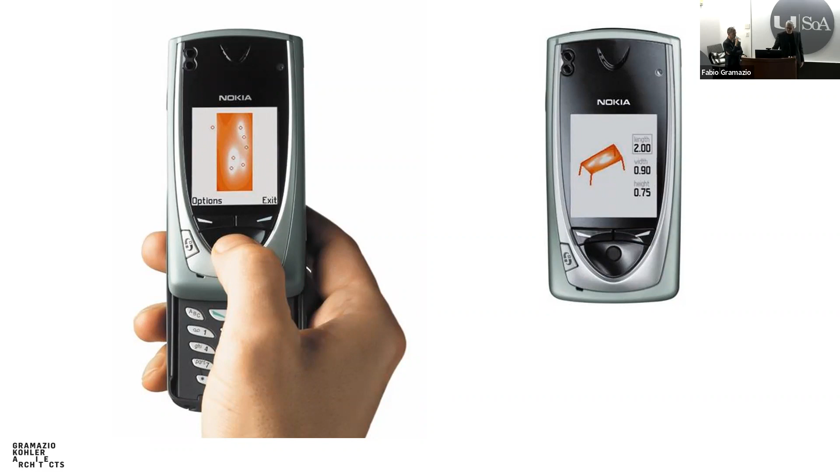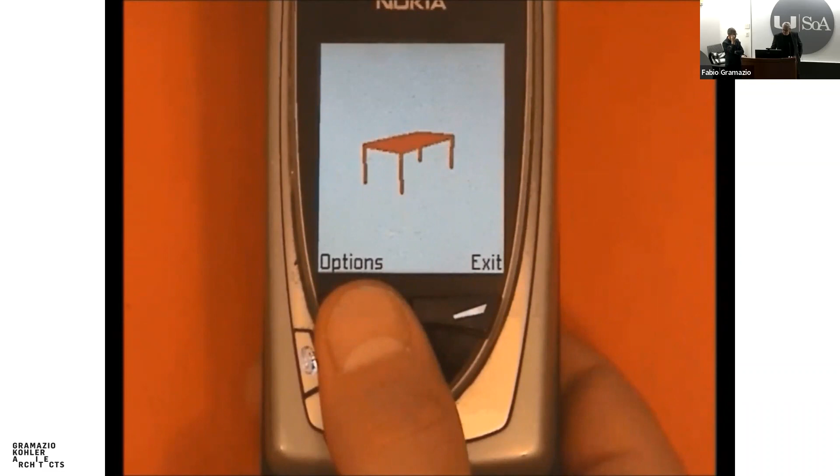So we were inspired by this and wrote a little program which allowed you with the thumb to design a table. It worked like this. You could basically move a cursor with the joystick and press with your thumb. And by pressing with the thumb, you would actually push in the lower surface through the upper surface up to the point where you create a hole in the table. And then you could send your design over the internet, and it would basically create this table for you. As you could see, you could also choose the color, you could choose the size of the table.

Now, what's interesting, the data which is sent looks very simple. It's a few numbers. You see here the author's name, Mike in this case. You see a color code. You see the length, width, and height indicated by L, W, and H. And then you see these basically 7 points which are indicated with the pressure data of where the human put the cursor and how much force it applied. So very straightforward. That's what you've been inputting.

That's sent to the server, and the server then recreates this surface, which is a distorted, doubly curved surface, which expresses this human touch in a digital domain. This data directly goes onto a CNC mill, which then transforms the physical material by removing this timber. And it results in a table, the M table, the mobile table, or the table designed on a mobile phone, which has these features of basically material loss in a way, where you see it has these very thin edges outside on the border of the table, also on the table surface.

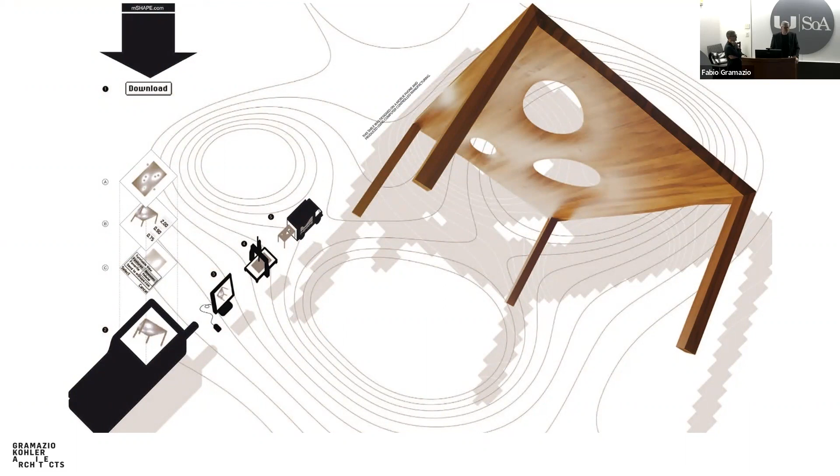It has this quite delicate landscape underneath. We then produced a kind of poster where you can see how this entire process is supposed to work for a potential client. Of course, you can imagine this wasn't a huge commercial success. This was really a prototypical project for us on mass customization.

But it was very important for us because it showed us that as designers, in this case, we could design a family of objects by designing a code, by having an idea and encoding this, and having other people participate in co-creation with this code. So all these tables here, you can see, easily belong to a family of tables.

So we're not losing any authorship by delegating the form actually to someone else, while in classical understanding of design, you would say the designer is mastering the form, right? And in this case, we're mastering this design system, which produces a form. So it's a different state of action.

Okay. So this table project, this was 2002, and this looks like it's a very long time ago. This phone looks prehistoric technologically, and back then it was the very beginning of our practice. We were doing competitions, having the time to do such open-ended projects, ending up with this rather ironic, but also very critical sort of project. And then just a few years later, this is now 2006, we're still trying to explain how we ended up being, as we were discussing before, the robot guys.

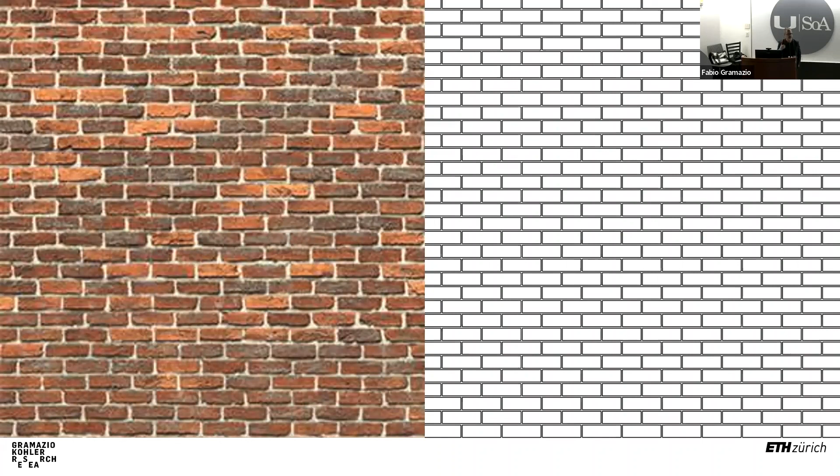But we all know that, for example, if you describe something for production, you will not draw it up for the building site, but there are much more powerful codes, cultural conventions, technical cultural conventions, like the concept of a bond type, that allow us to describe the end result through a process. So bond type, a stretcher, many people share the understanding of what this means. And this is not an image, this is a sequence of actions. And this is already very close to a program.

And once you have this term stretcher that you share, then you just need a few parameters, very simple ones. Think back of the table. So you need the size of an object, a brick or a type, and then you need a few dimensions, and then it's done. So you can describe in a very compressed way, in a simple way, what you want to a human. If you want to tell this to a machine, let's say a robot, a computer, then you cannot use the term stretcher, because the machine doesn't know what a stretcher is.

But there is this notation here that is as simple as possible, because it's just the basic control mechanism of programming. One of the basic ones, that means looping, repeating something, where if you nest two of these things, one into each other, then what you get is a brick wall. So it's the exact identical description as what we have seen before. And here is where a robot kicks in. You could say, okay, this is uninteresting, this is banal, we are just automating something. So we are creating again a stretcher bond.

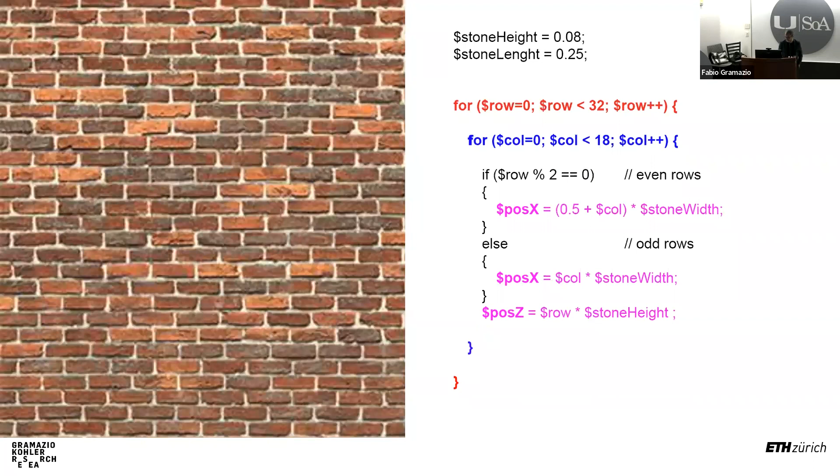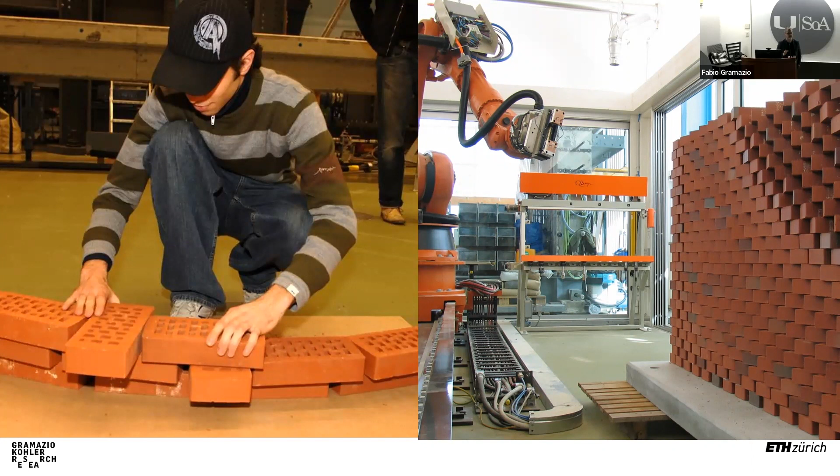But this is where the circle closes. The machine that doesn't understand what a stretcher bond is understands this very well. And it's the only thing the machine, I'm talking about 15 years ago. Now we could discuss new developments, but back then this was what the machine would appreciate, would understand, and would execute independently from concepts of complexity that are important for us humans. For the machine, there is no easy or difficult position in space. They are all identical as long as they are in the reach of the machine.

So we are able to connect directly the human act of designing, of making design decisions, with the machining act of building. And what is important here to understand, and there I go back to this artist image, what we want to leave behind is this notion of competition, of antagonism between human and machine that is deeply rooted, of course, in 20th century experience, 19th century experience, cultural experience about what machines mean to society. But we are convinced that by reconsidering this relationship, turning it into a positive collaborative one, where we say, okay, what are the roles? What are the strengths of humans and machines? We can do things like this.

And this is probably one of the first moments when we felt that we would need a term like digital materiality that would describe what happens here. Because there's a thing that cannot be produced by humans, but it is clearly designed by humans, follows a digital logic, but it's completely three-dimensional. So this is not 2D graphics. And it's the result of a collaboration between humans and machines.

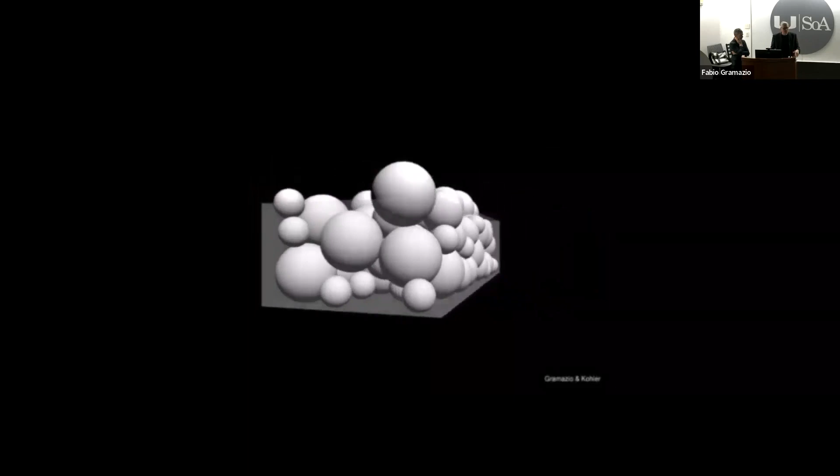What you can see here, you probably see it best in this animation, is how we designed this facade. We looked at this building as an abstracted container in a way and filled it with oversized abstracted spheres, which were meant to be grapes, but not in a depicted sense, but in an abstracted sense.

We then looked at this container from the four sides of the facade and basically took this view into this virtual three-dimensional space onto the facade by translating these spheres into rotation of individual bricks. You see here this dynamically filled volume. So again, we delegated part of our design control to designing a process on how we would design this facade.

Tune down the volume here a little bit.

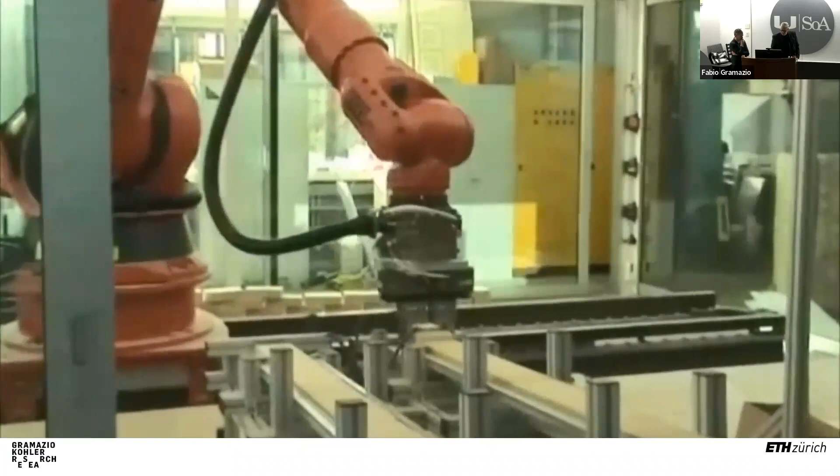So here's how we produce the facade. You see the robot picks brick by brick, as Fabio previously explained. And he, or she, we don't know actually, it applies the glue. And you see this particular pattern that's quite important. That's actually exactly the overlap area between two bricks. And since each one of those bricks is individually rotated, of course, the overlap pattern is different for every brick.

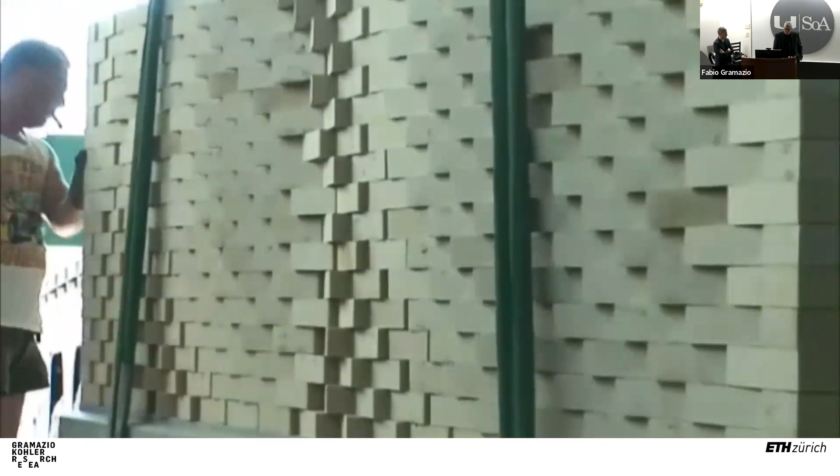That is something which can easily be solved with the computer and with programming, but for a mason, it would be rather hard to always put this glue at the right location without spoiling the next brick. You see here how traditional crafts and this digital craft come together. You see the installation, you see the reference in a way, and the transfer.

And you see that only by this very slight rotation of the bricks, that's only up to 17 degrees in one direction or the other direction, so a very small rotation, in the sunlight this creates a very strong plasticity. And you can also witness that the material itself, the brick, gets a very high presence by this design principle.

So it's not the same as producing just a digital image, just a pattern. Although it is somewhat similar, it actually exposes the material, the brick, when you go close, and you start to, in a way, lose the more pattern-like aspects if you approach the building.

In the inside, you have also an imprint of these transformations. Here it was important that the bricks were put very closely together so that the rotation would actually start to close the gap in between them. If we would have put the bricks 1 or 2 centimeters more apart and you would rotate them, in the counterlight you wouldn't see anything.

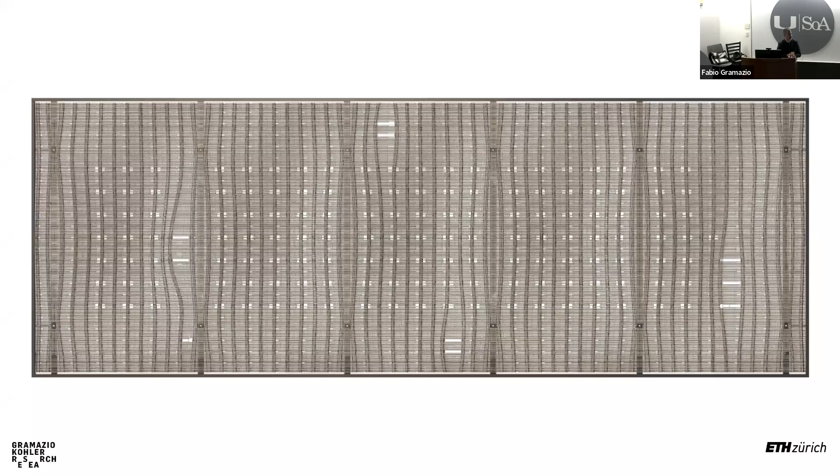And what you see here is probably the only drawing that exists of this roof. It's a plan view, and you see here about 50,000 different parts that are aggregated in a way that looks or feels very much like it would be a textile, a fabric. And we like this image very much, although you never see it like this.

It's a virtual viewpoint, but you see phenomena like these big trusses, 15 meters long by 1.20 meters, 168 of them, and how they can stretch and compress depending on other structural parts, which are in most parts the columns supporting the roof, but also less important things like ducts that need to punch through the structures. Normally, above the staircases and things like this, you get these dimensions very late, and then often they're just cut through a structure in a more or less ugly way.

Here, what is nice to understand is that until the moment this structure is built, it's just computation, it's just data, it's fluid. And until the moment you decide for the production, you can stretch it. So the material can create openings to let parts pass through.

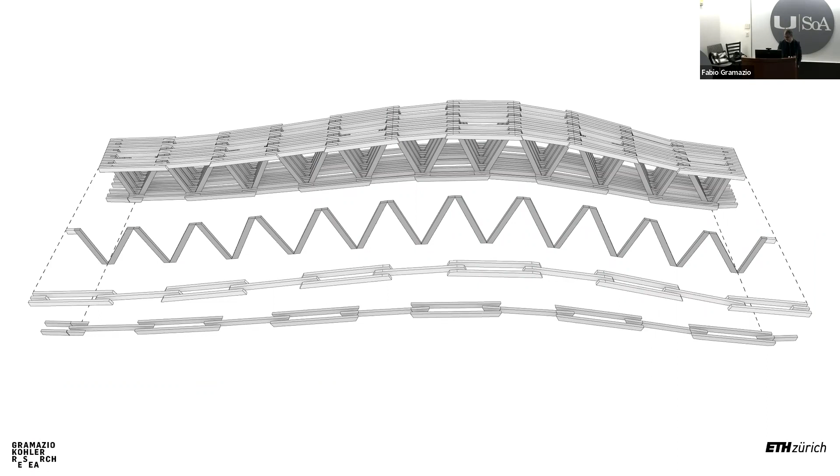Now here you see the basic component. This is a truss: upper chord, lower chord, and diagonals. But it can adapt to a specific situation. The material can compress, can stretch, can follow a specific surface. What you see here are the basic layers where you understand how it's built, how the joint where the diagonals meet the upper or lower chord of the truss is done.

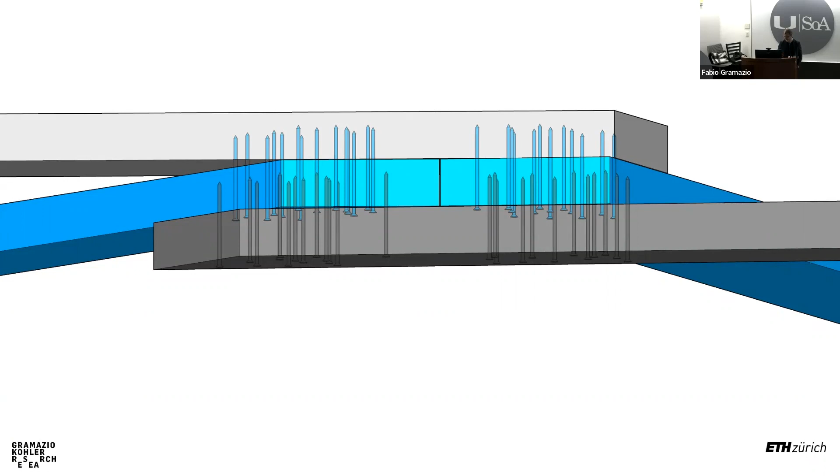And here you see the second element. This roof is 50,000 different parts, identical or different, and then nails; it's nailed together. There you see a little of the complexity, because this is hidden. If you nail through these layers, you have to find unique patterns where to put the nails. Because it's done robotically, it doesn't matter where they are, but you have to decide as a designer where to put them in order not to have conflict. And here you see how complex it becomes.

And here you see how, once you have this computational design that starts from dimensions, from an idea, from this truss I've shown you, you can start to play around with it. You can stretch, you can deform, but you can also optimize. Think of these nails: in a normal project, you would look for the weak point, the worst case, and then dimension everything accordingly, just because you are not able to differentiate. Which is completely stupid. If you're able to differentiate, to look at where you need the material, this is the process that has been done here.

It's pretty banal, straightforward. We said we will not adapt the height of our slats, precisely for logistical reasons. We will stick to 3 different heights. But with these 3 different heights, just by differentiating, we're able to dramatically reduce the amount of timber that you would need to satisfy the worst connection.

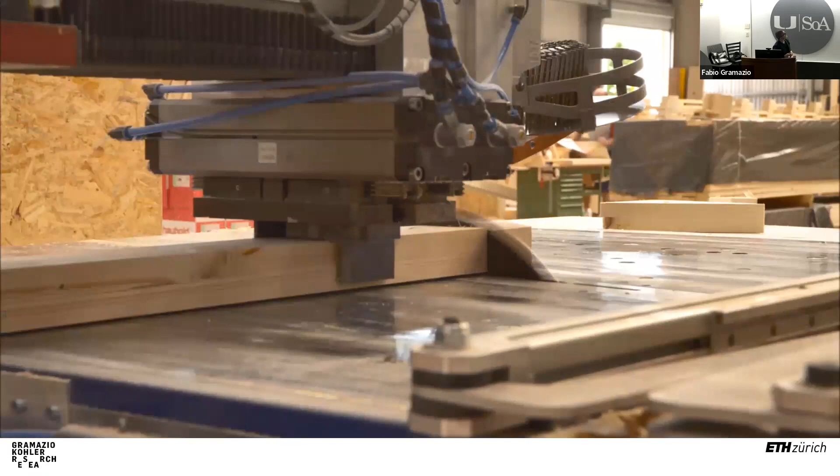And here you see the process. The robot is slightly bigger, but basically it's doing the same thing. What happens here at the beginning is new, special; this doesn't happen with the bricks. You see this part is custom cut to length. But from here on, it's exactly the same. Instead of putting glue here, the machine will just shoot the nails at the right position. And these are all existing industrial processes.

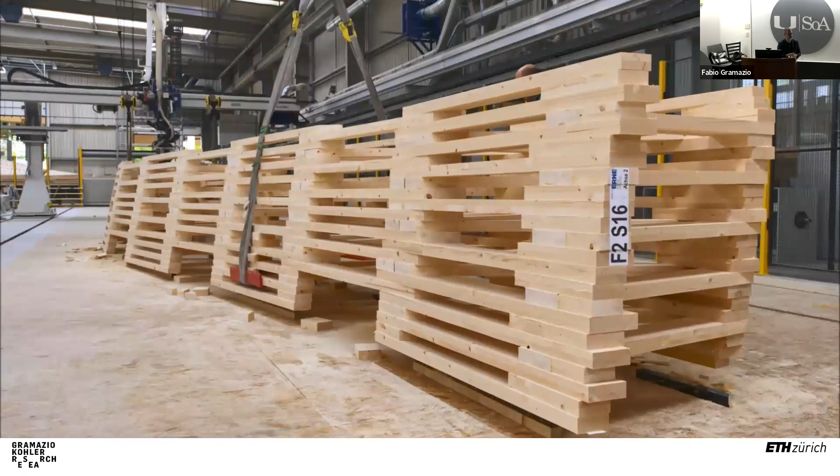The only missing part that had to be developed to make this structure possible was the computational workflow. Also to be able to communicate with the structural engineer, because this is not a thing you can draw up and give to the structural engineer, 50,000 parts. How would you want the structural engineer to model them? You have to agree on an interface that allows you to go back and forth until everybody is satisfied.

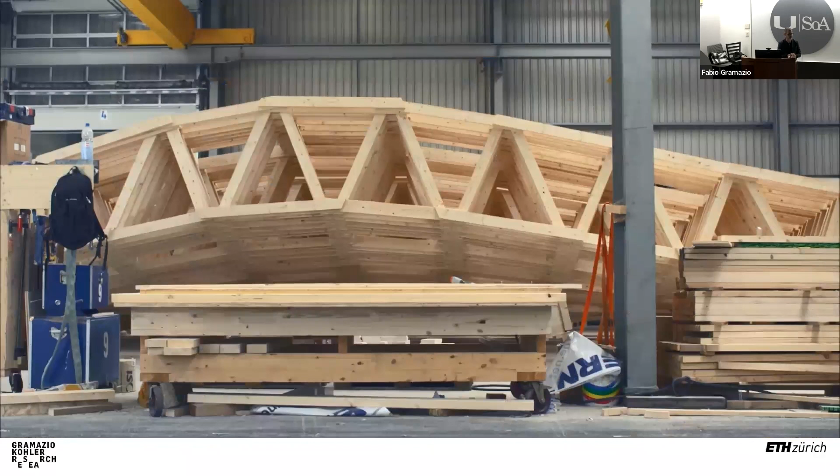And from here on, it's the logic of prefabrication. In the timber industry, this is normal. These custom parts now get pre-installed: sprinklers, power, lights, all these things get introduced in the truss here in the shop. And once they are complete, they are trucked to the building site, craned, and you see here the relationship between data, humans and machines.

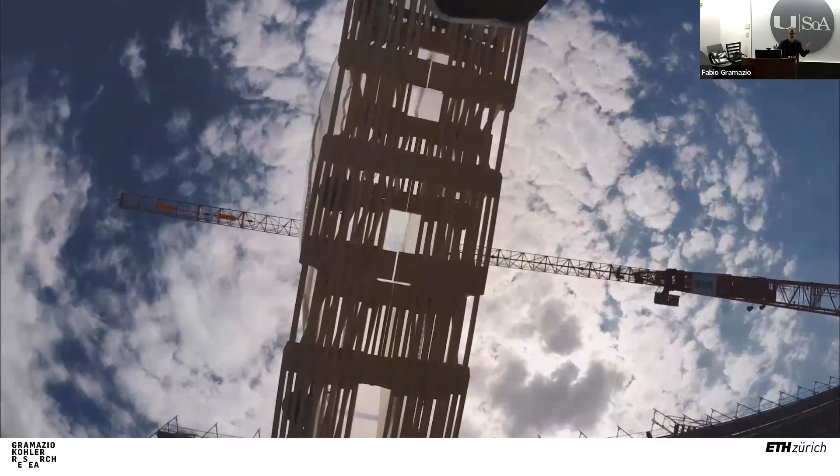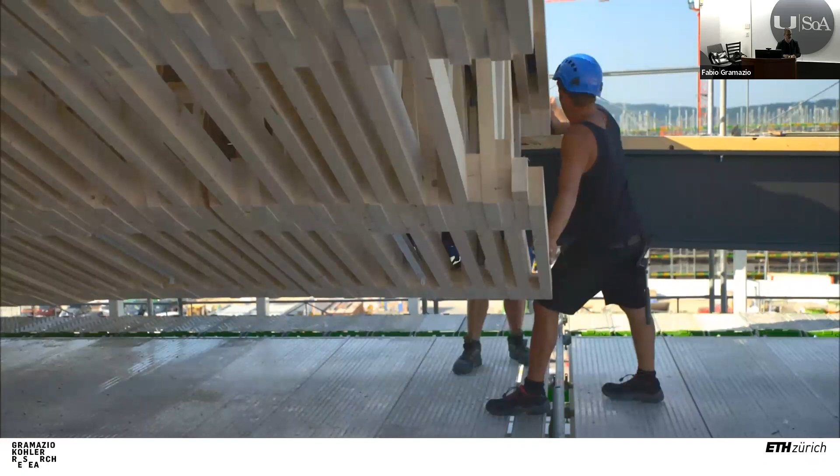You start with 50,000 parts. Imagine these parts on a heap. You have no chance to deal with them. But in the shop, through this prefabrication process, the complexity is reduced down to 168 parts that come to the building site. And then it's extremely simple. You just place them, put in a few screws, fix them, and you're done. And you end up with this strange construction where data and light and material start to intervene and overlap.

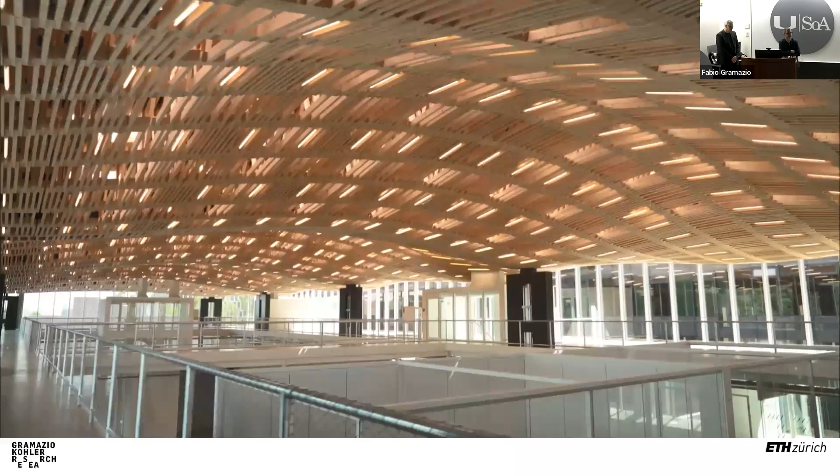One important characteristic, at least for us, is that it's one material system that does it all. The structure is also the architectural finish underneath. It's containing all the technical systems. At the end of the day, it's extremely simple as a system.

You've seen how something like bricks, timber slats, etc. start to become, in a way, almost like malleable materials if they're treated digitally, customized, shifted, rotated, cut in a bespoke manner. Now we'd like to go to another category of materials, diving a bit closer to the material aspect of making. We were, since the beginning, always fascinated with truly malleable or soft materials, which are partially used in architecture, but they always resist a bit the traditional ways of fabrication.

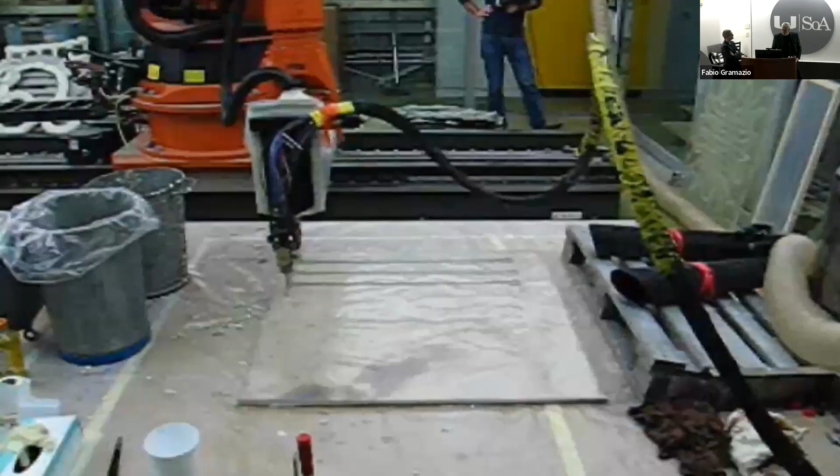There was a first experiment, a semester we did with students called the foam semester, where we put polyurethane foam onto the so-called end effector of the robot. The robot had a nozzle with which we could dispense this foam material. The property of this foam is that first it's put out in a thin line, but soon after it starts to expand, to foam up.

You can witness this if you watch the video. The older parts of the material, the parts that have already been deposited earlier, start to foam up, so that the material itself is not homogeneous, but a material with age. There are actually different materials with different ages, or the same material with different ages, on this panel. You start to understand that the temporal process of the robot laying the material and the material self-formation process start to overlap.

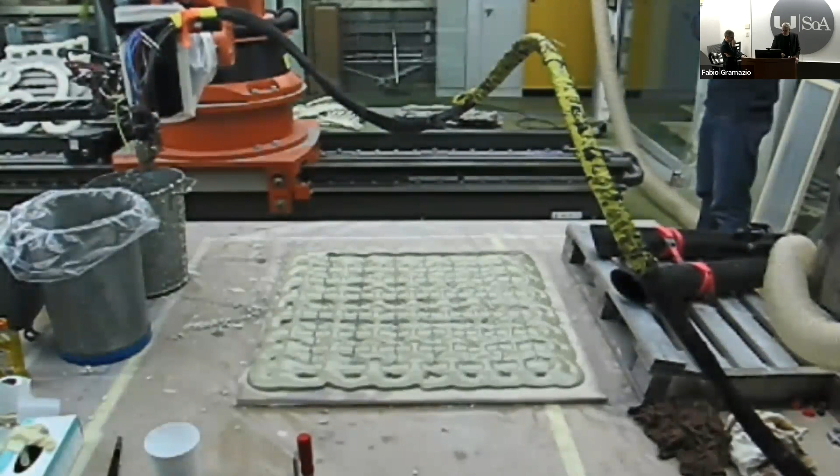It starts to become quite complex as a design matter, and also quite intricate to see what you can produce. You see how this slowly foams up. I'm going to jump now, for sake of time, to the finished panel. You see how extreme, in a way, these formations get from this simple material process. So here the self-formation of the material is creating the form.

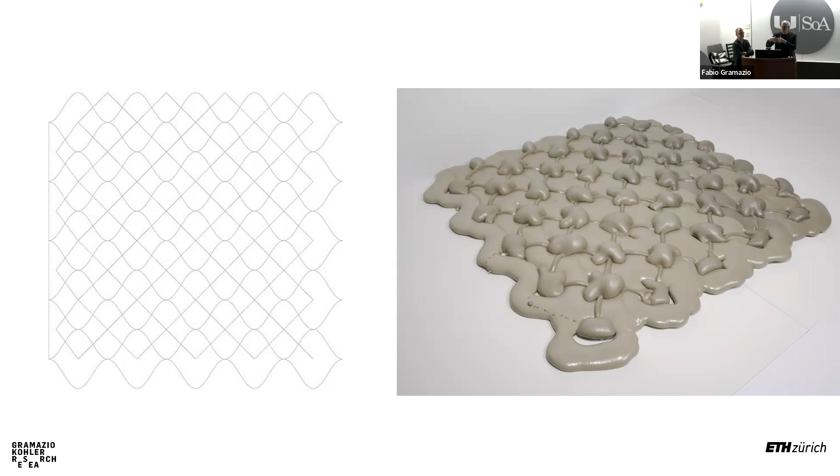Okay, because this level of control wasn't particularly good, and the material is really an ugly mess. It's this 2-component stuff. We decided to abandon it pretty quickly, although it's extremely challenging and beautiful to think about what happens there in this radicality of these 2 temporalities that overlap and interweave, and so on.

We then decided to go to a much simpler material, sand, that is not less fascinating, but simpler and cleaner and easier to work with. Sand has fascinated many people. I think probably everybody knows the studies of Frei Otto and so on.

But what we were interested in is the processing of this material that, like the foam, would have a behavior, a way it forms naturally, so giving you a resistance to formation, but at the same time also doing automatically sort of material computing things that you would not be able or would not design. We were interested in coupling it with this automatic deposition.

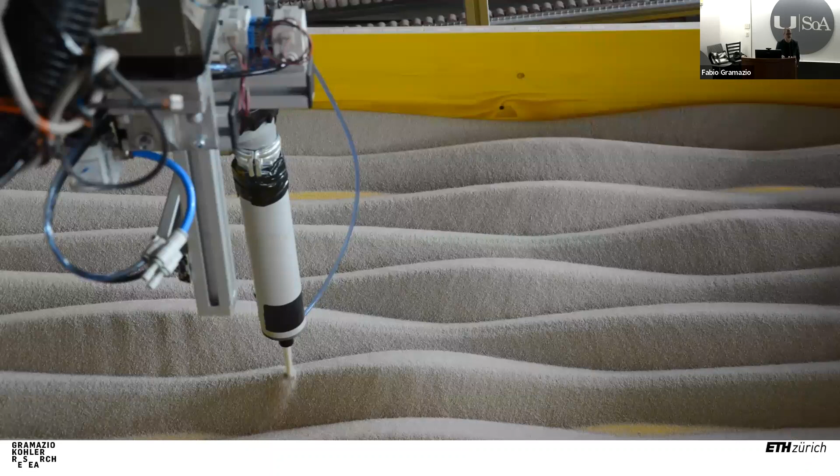And these things are also fascinating because they are completely ephemeral, and they are recyclable. We'll see this later on with other projects. Here, the follow-up of it: these processes we still work on with students, because in just an intellectual way, they're extremely nice. But back then we looked for an application that would really justify the use of sand, and we created reusable, completely recyclable molds that were fixed.

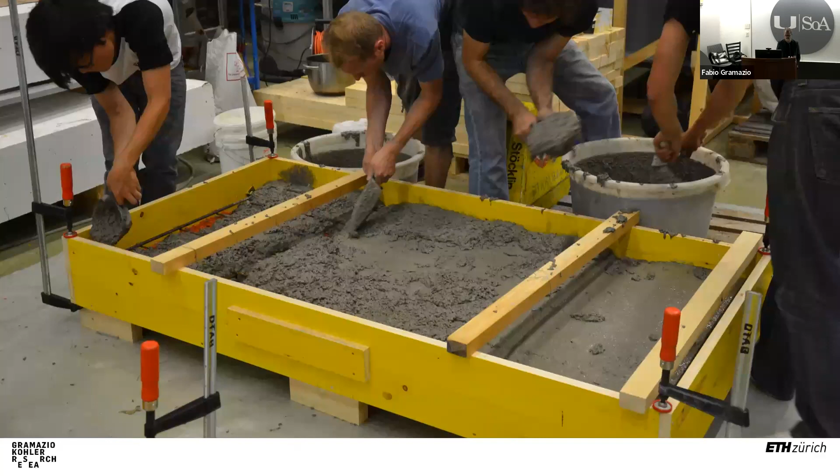So first you had the robot depositing material. And this is a very quick, very simple process. If you compare it with production of form, if you would mill or cast or whatever, this would be a nightmare in terms of cost, completely unsustainable. Here the only thing that comes in is a very thin 1 millimeter layer of latex that is sprayed on top of the sand, in order to avoid the cast concrete penetrating too much into the sand. Then we have the casting of the material. Then this peeling process: after the demolding, you get this latex layer off.

And then this again was student projects, three large scale panels that, from the point of view of form, come for free. So there is the minimal amount of energy and material that you could invest in order to create extremely complex shapes that can be custom.

So then naturally the question starts to arise: well, you can lay foam, it flows, maybe it foams up a bit. You can lay sand, it forms certain angles. Well, how do we actually get architectural? How can we actually build? Can we get vertical? And so, inspired actually by a science conference on jamming, we had this vision, or the question, let's put it that way: is it not possible to aggregate gravel in a way that when we put load on it, it self-constrains itself, it gets jammed. So imagine this like a traffic jam in a way.

It's basically the particles block one another. And then if you release the weight on top, it actually unjams and you can reuse the material. So that was the basic thought, inspired, as I said, from this physics conference.

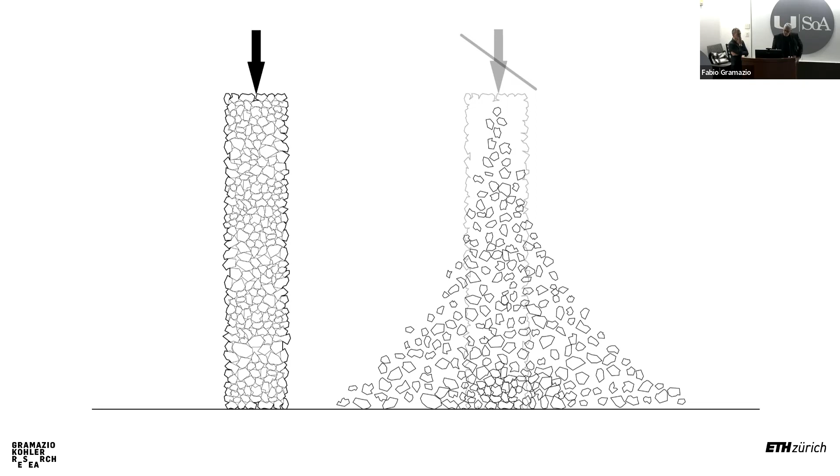And of course, this was not so easy because still if you get gravel, it does this. So it's just a widely available material worldwide. It's very abundant. It's very cheap in most of the places. But how do you get it to stand up? So we did a lot of tries.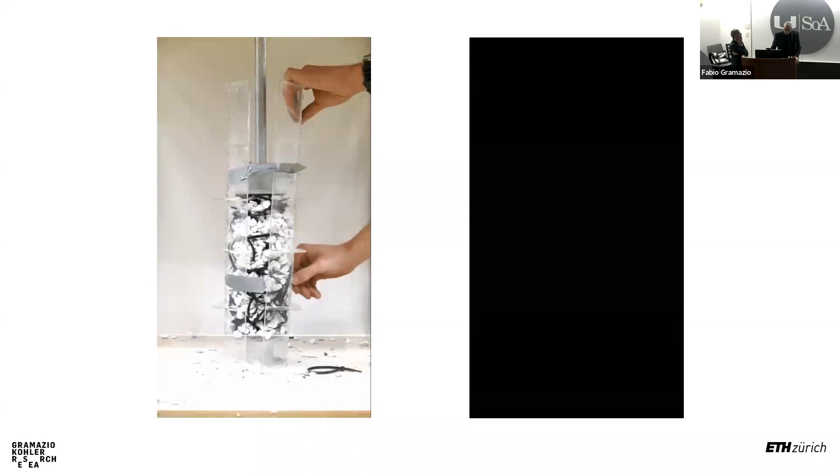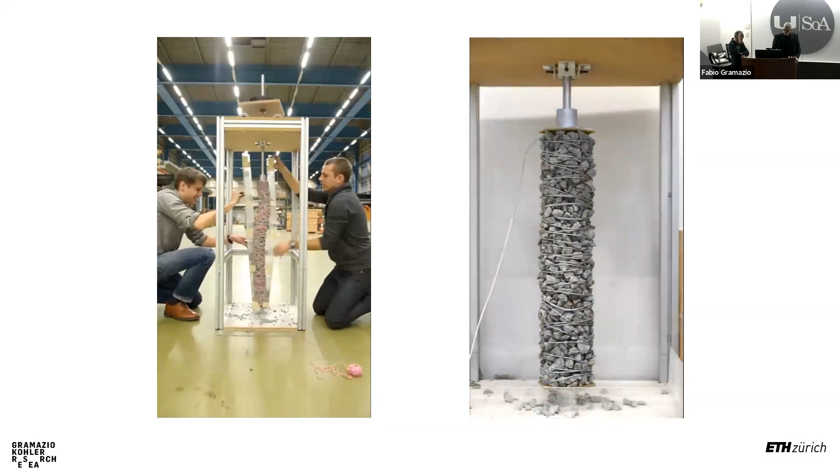You see, we started to mingle these kind of particles with other materials, with ties, with wool, with all kind of tension elements. Say, okay, how could this work? And then slowly over time, with many, many tests, we started to figure out, well, with the right dosage of gravel particles and string, and with some pressure, which is actually needed to constrain the system, so you see above this piston, we can actually achieve pretty slim columns.

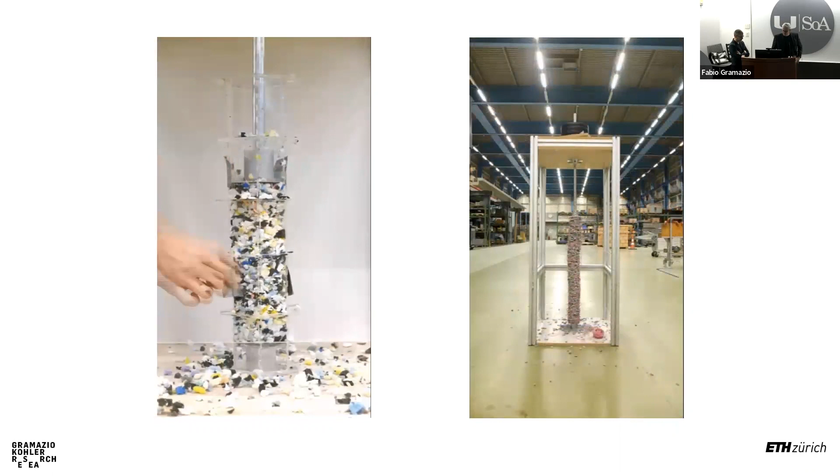And you see here in the video, this is Skylar Tibbits from MIT, who was collaborating with us on our project. So he joined our lab, and together with Petrus, our PhD researcher, we did many, many tests, and we found basically some first initial formula on how to build slender elements with these two materials. So gravel and a very, let's say, inexpensive recycling string, which doesn't need to be very performant. It just actually needs to keep the gravel from moving.

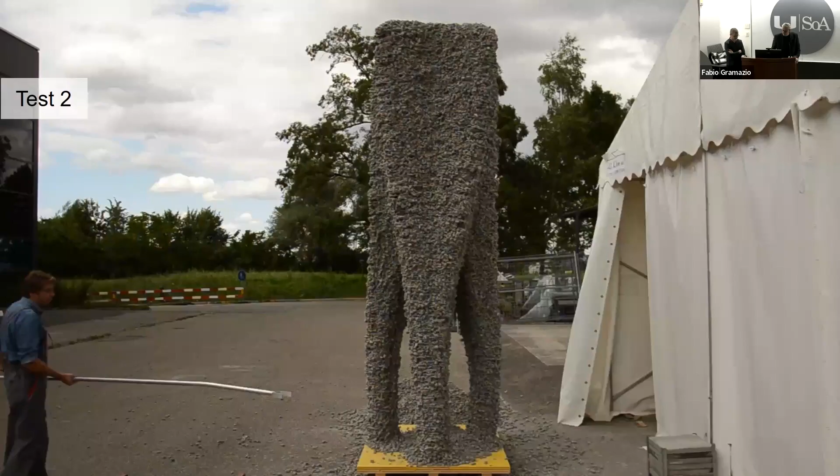And we exhibited this project at the Biennale in Chicago. We developed this structure. This was an early prototype for it. So we built a structure that you can see has the basic characteristic that it stands on thin feet, but it has a huge volume on top, which creates the load, which is necessary to stabilize the feet. So this expresses directly what is the characteristic of this material system. And you see how beautifully it disintegrates if it falls. It liquefies actually. It goes back to its previous state.

So I think for us, this is pretty close to fundamental research actually in architecture. It's about sustainability. It's about reversibility. It's about how to make processes circular. It's maybe not yet a full building system, but we wanted to try it.

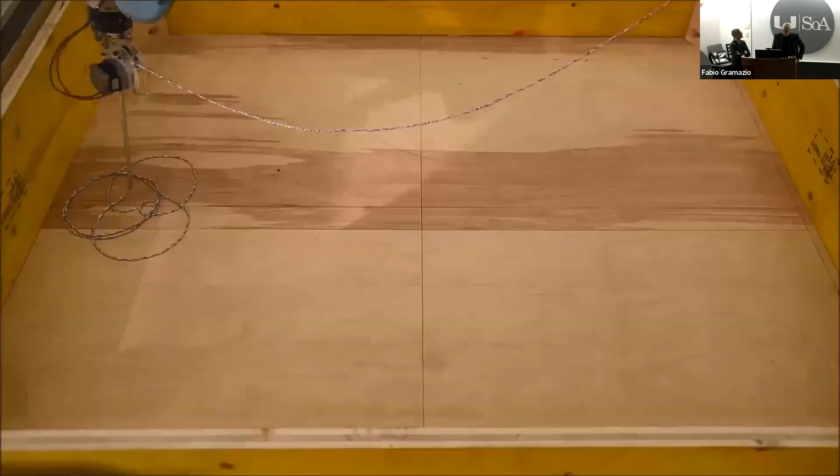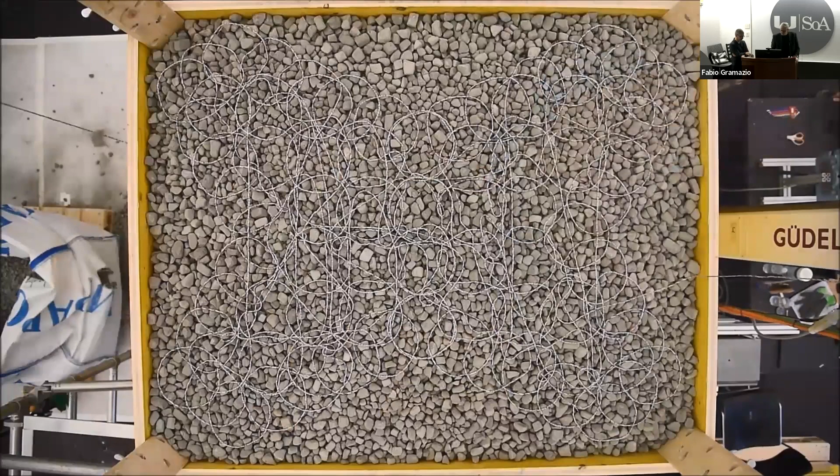So in Chicago, we had built the system in such a way that we built this box into which we manually laid a layer of gravel, followed by a layer of string, which was deposited by the robot. And the string pattern, I think you can sense it here, is the shape at that particular layer. So it's literally a 3D printing process of this composite in this formwork. And then here again, another layer of gravel.

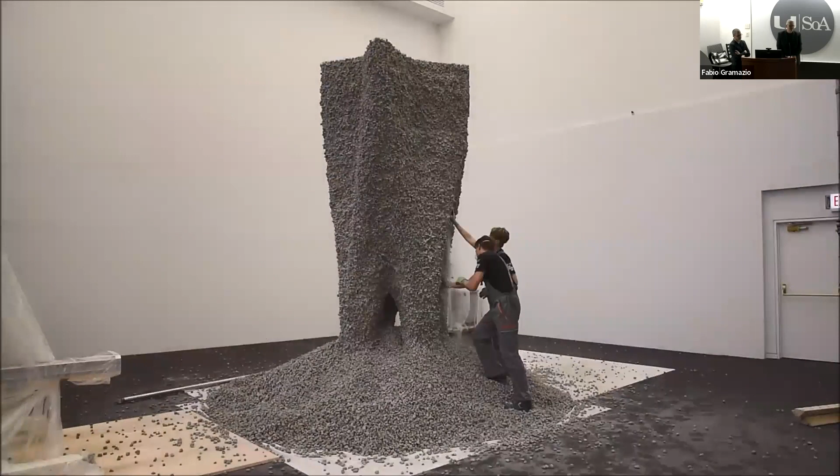In this case, it was a lighter gravel due to the floor load restrictions of the exhibition place. So it actually stuck a bit to the volume, as you can see here. So we dismantled this box. You can see parts of it already falling off. And then you can basically, just by gently touching the structure, unearth the more solidified jammed structure inside it. And this is how we exhibited the piece.

I mean, the people were amazed by the structure, but they, in a way, didn't believe that there's no structure inside. So if you told someone there's nothing inside, and sometimes I was going there and touched it, and some gravel would fall off, people, of course, back off. It is, in a way, a scary thought, right? It's a number of tons of material which are standing there, and their movement is basically frozen in time.

And nice little details appear, like this little stone here on the edge. So it shifts a bit our apprehension for what details maybe could also be in architecture. But the nicest part of this project is that then afterwards, Petrus, our researcher, could just basically activate the spool and pull the string out of this structure.

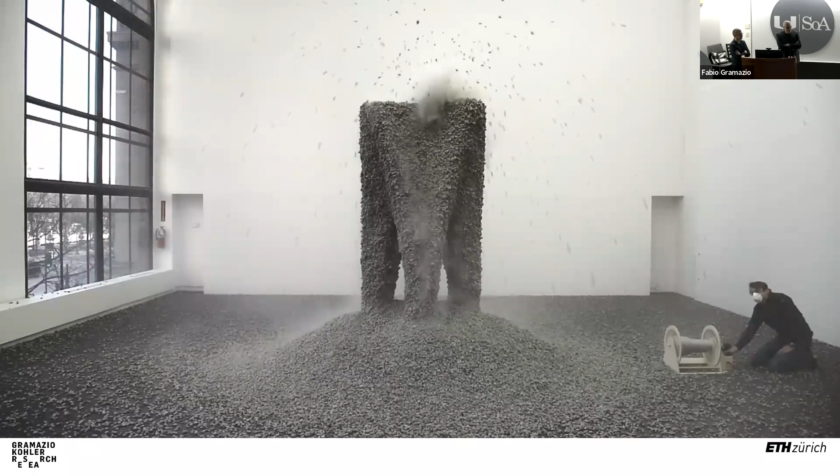And so in quite a dusty performance, the structure would unbuild and we would end up with the two basic materials from which the structure was built, which is string and gravel. We then later had the chance, I'm going to forward for time reasons here, if it lets me.

We actually had the chance, and it was quite a courageous project, to do this in public space. We needed to convince an engineer that this is viable, and we found a courageous one. Not all engineers agreed that we should do this, but basically the engineer agreed that if we monitor the structure in a certain rhythm and we see that it doesn't start to shift, it's safe. If it starts shifting over time, then it's not safe.

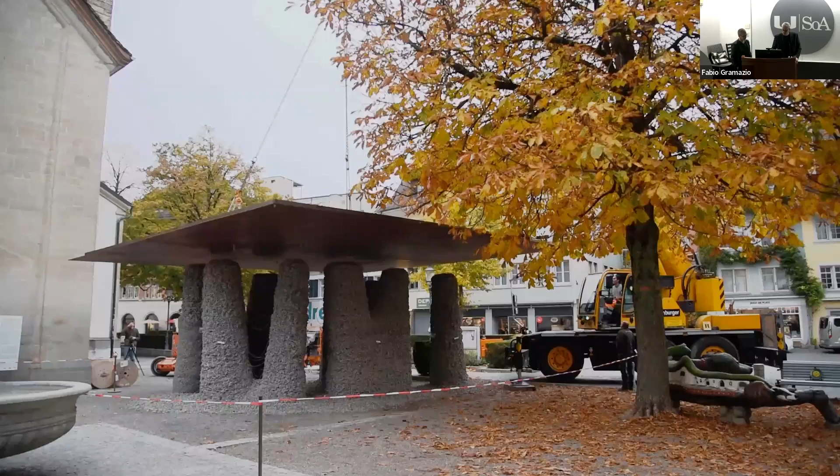So we could actually find an agreement, coupled with a number of load tests, so that we could build the structure. Here you see, of course, the roof plate does two things. It protects the structure from rain, but it also is the weight that actually reinforces the structure. This was now built from just ordinary gravel, like it's used on train tracks, etc.

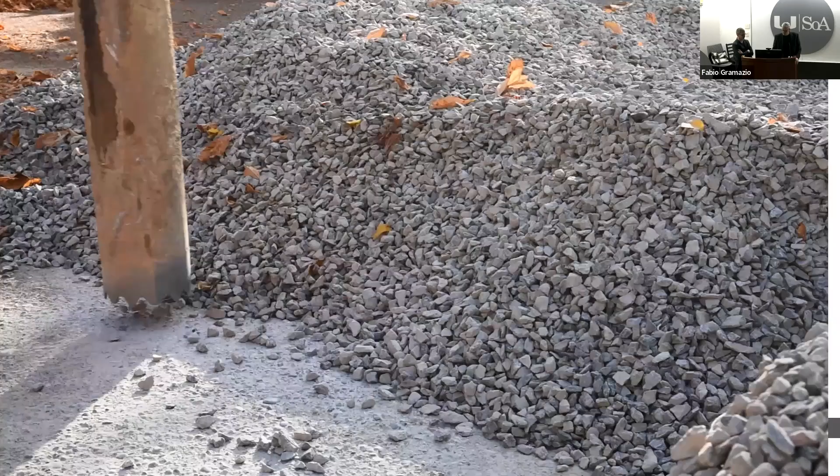You see here the build back process. I'm not showing the fabrication process, but just the build back. So we lift off this steel roof, steel plate, which can be reused. And again, just on a slightly bigger scale, we pull out the string. Until finally we have the raw materials, which we can take away with this wonderful machine here and reuse them.

So we would like to show also this other side of architecture now, right? Because the build back of architecture should become our new design topic. We need to take care of it. We need to also appreciate the aesthetics of it and start to understand it as part of an architectural cycle.

Now we've seen these gravel projects. The fascination there, or the motivation, is this radical sustainability. Proposing a material system that can be literally rewound like a movie. You go back to the original state. You have no degrading of anything. You just start over, reusing it or building something new.

Now, the next project I'm going to show you is addressing similar topics, a similar motivation, but with a completely different material system. Because here it's not about self-aggregation. Although it looks like it here, these are big stones, heavy stones, 1.5 tons on average, that are mixed with, you see it there, rubble, demolition rubble, concrete parts, and so on.

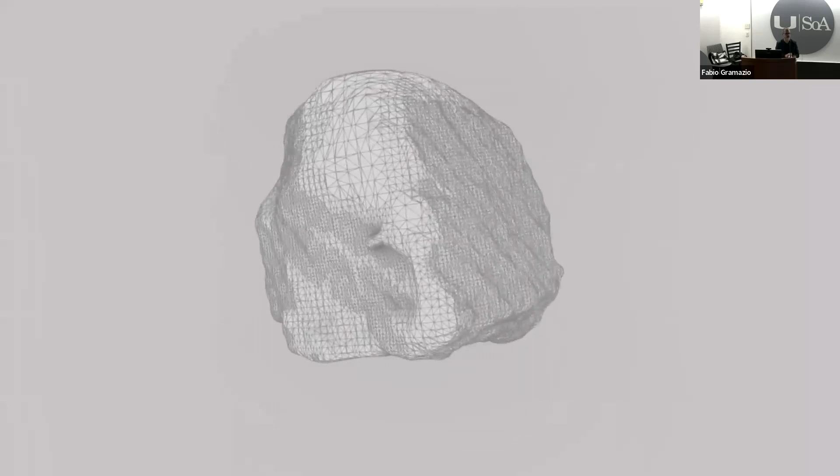And the approach, which is opposite, is: can we, with really big machines, excavators, start to do what humans did for thousands of years, to stack very complex stones as found, maybe with minimal modifications, so building dry walls that would be highly performant and highly sustainable, because the materials are sourced on site, but do this at a scale that we cannot handle.

And in order to do this, you have seen it in the movie, we need first to acquire information, to scan, to be able to understand what the form of these parts is, in order to handle them and to find the good location. And this is a very complex logistical and computational problem, because if you had at your hands all the stones of the world, then it would be pretty simple. Then you find the perfect solution.

But you always, and this is the same thing that as a human you experience if you do it manually, you always have a limited understanding of the problem in a particular situation, and you have a limited amount of parts that you can grab or that you can use. So it's an optimization problem.

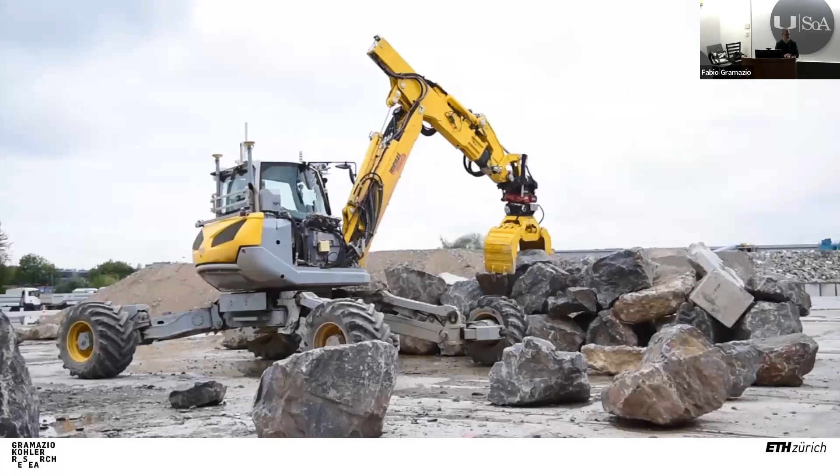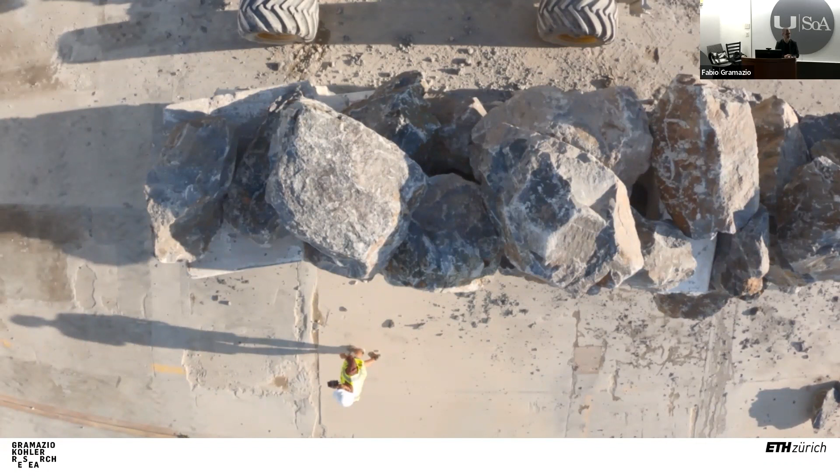And this has been PhD work done by our PhD students, but also, of course, with roboticists for other PhDs at ETH that were looking into this automated excavator that could process this data and then grab the parts in the right way and deposit them at the right place. And we've been able to build extremely slim and performant parts, walls, retaining walls, things like this with this machine.

You see here, it is very beautiful, but also speaking about a different use of our waste, what we could possibly make out of our waste if we are able to understand these parts and to reposition them in a way that makes sense. And as a demonstrator of this PhD work, at the site of a company that does recycling of buildings, we have been able to do this very long retaining wall with this technology.

Now we move to this material. That's earth or clay. Basically, earthen materials were also a fascination for us for a while. We didn't really know so much what to do with it, but we had an idea which we wanted to try, which was actually shooting material. And there it seemed like earth would be a fantastic material.

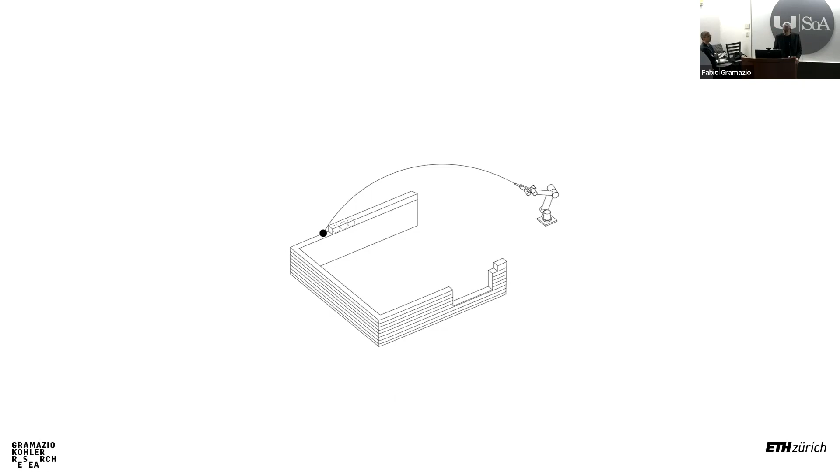So if you think in terms of fabrication concept, classically, a machine that fabricates something is as big or bigger as the part that's being fabricated. So what we were conceptually interested in here is, can we have a machine which is smaller than what is fabricated and actually throw material, that's why the project is called remote material deposition, at the location where we would like to aggregate it. It was a bit of a crazy idea, and we tried it at the Sitterwerk St. Gallen.

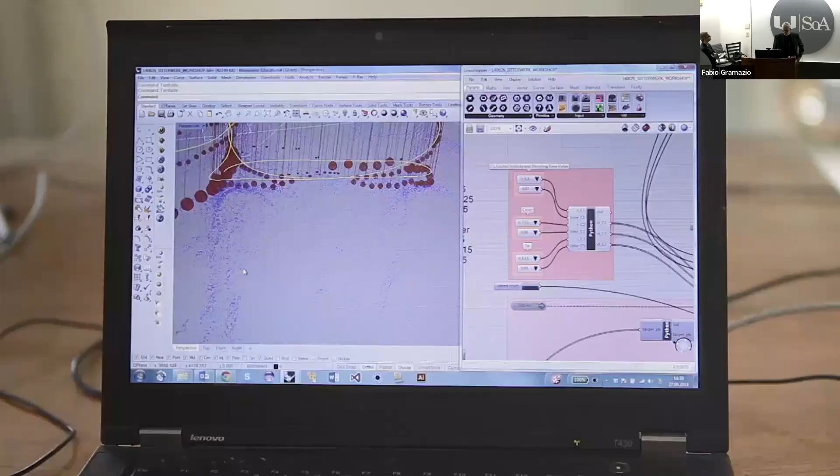And here you see this apparatus. So it's basically a robot that can guide the shooting mechanism. You see that here. And we prepared these clay projectiles, and we shot them in a ballistic curve. And these ballistic curves, they're pretty calculable. And we installed a scanner system, where we could from time to time scan what we had been throwing.

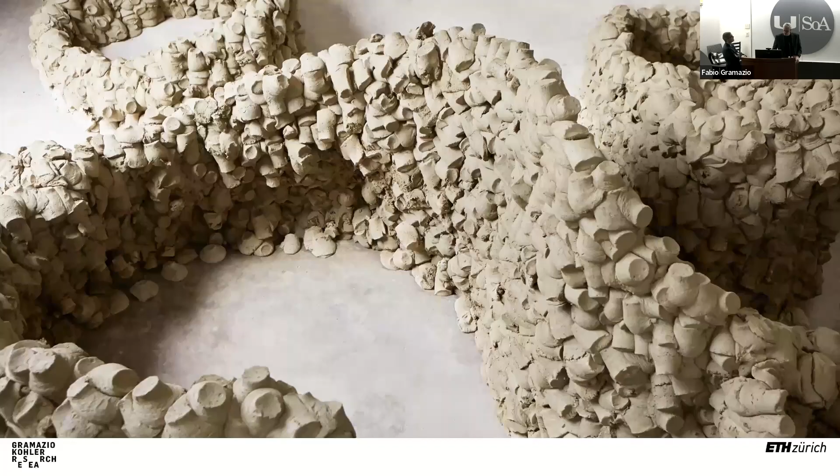And you can see we were able to build a structure which was about 10 by 10 meters with a height of up to 2 meters. So I think this was the highest point. So this was higher actually than myself in this case. And this was also actually a very slender part, because in the direction of where you would shoot the material, the precision of where it would land would be very, very good. If you had a wall which went in the other direction, it would start to blur out due to some random forces or sticking, etc.

So it also had this particular expression in the material system, which we liked a lot. You see this deformation of the projectiles, which expresses itself. And here you see such a projectile coming from the landing point. So it again has also a performative aspect. Yeah. Have you seen it?

This last project, it's again about the control, and also how much control can you pretend to have or force a material system into, or what is even interesting. And this project, its beauty is really the fact that these things are completely out of control, but at the same time, at a statistical level, they allow you to control form, but still you will be able to read. If you look at these formations, it's really speaking about the process, because you see through the deformation of the single parts how they have impacted the other parts that were already there, and so on and so forth.

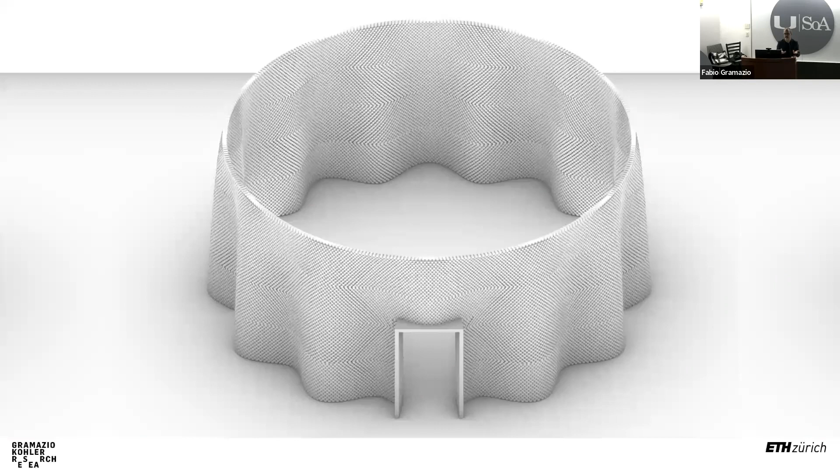But we would have to find a shape that would stabilize. So this undulation makes it stiff, because at this dimension, 5 meters high, it's 15 centimeters thick. This is paper thin. If it weren't undulated, it would just collapse and break. And we developed a process with a machine that, instead of throwing this, it's the same amount of material, these cylinders. Now the machine would sort of press it into position.

The big challenge has been how to segment this thing in order to have it buildable. So have the machine able to address a certain range of operation that then is moved from time to time. And you will see it now here. These will also be the joints that remain readable in the final piece.

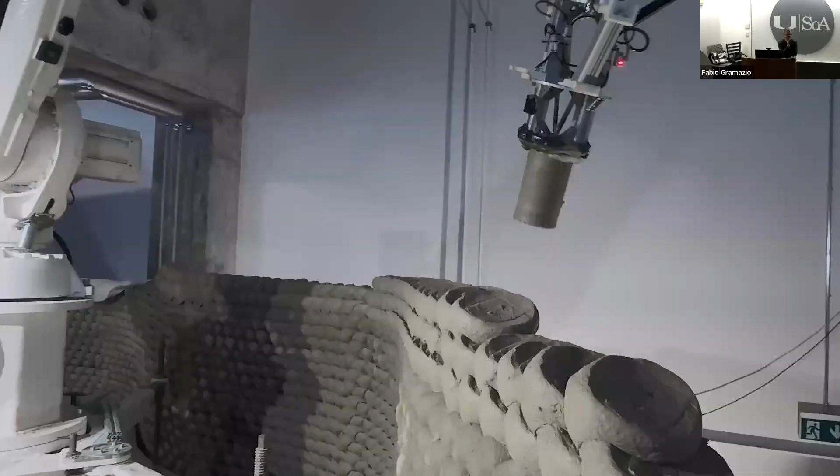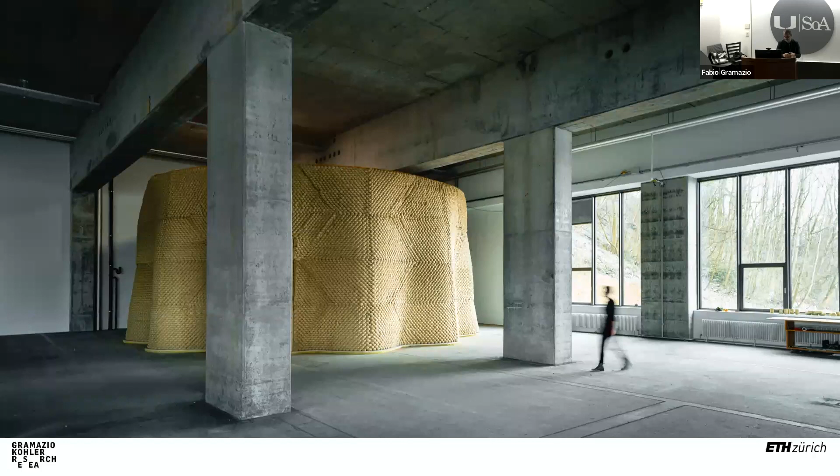This is now about a lot of control at the level of the placement of the material, but still, because clay is a difficult material, it shrinks a lot. You then have these patches that become visible, so it resists this digital perfection that you could read into it. It becomes extremely sensual and physical and material.

Good. So now we ventured quite a bit into different material systems. I think it's important, particularly for our future, to start to understand these materials and maybe work with them in different ways, and also explore the cross section between these different material systems, which can also be malleable material systems, and digital processes, because maybe the ways that we build will change.

Now we would like to come back a bit to full-scale architectural projects, which of course also have pragmatic limitations, but we would still show you how we try to push research into architectural building projects. This project here is a particular case, because here we actually had 4 research projects which we brought together on one architectural project, because it's rarely the case that you only have one material system that you can create architecture out of.

So this was the first project where the entire structural system was built with digital fabrication processes. This is a fully approved building by Swiss building codes. So this for us was an important step, because we go beyond the arts installation, beyond the prototypical, beyond the experiment, which we love and like, but at the same time, we also want to say, this is for real. We can build buildings which are inhabitable and usable.

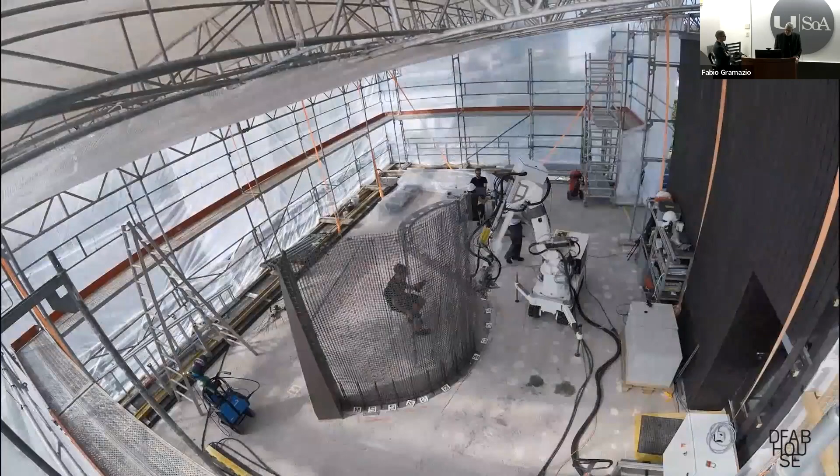So we start with this mesh mold wall. This is the central wall which is supporting the upper stories. Here you see it's the first time that we built on site with the same robot that Fabio has shown before that built the clay structure. So this robot is here used to build this mesh. It's called mesh mold. It's a mesh that is at the same time the reinforcement of a concrete wall, as well as the formwork for that concrete wall.

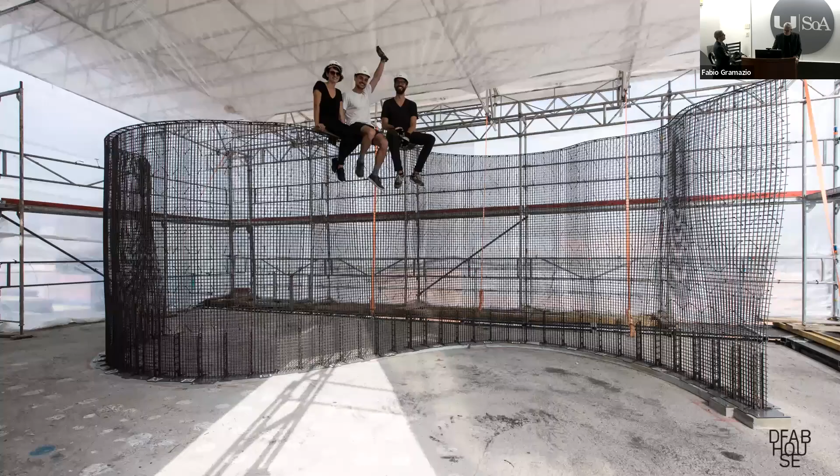So the research is on the one hand on how to build such a doubly curved wall directly on site. We see it here, this beautiful mesh, but also how this mesh can directly be the formwork so that we can build with concrete without using formwork, which is again very good in terms of sustainability, but even economically, it is interesting.

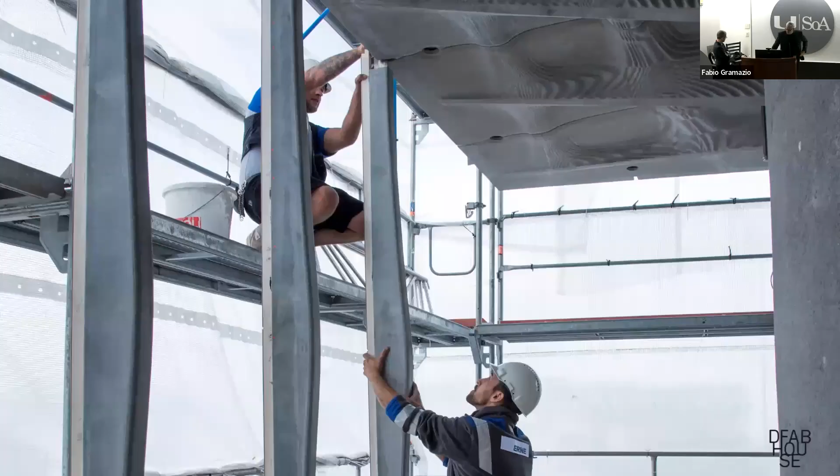So this mesh is basically filled sideways. This is an earlier version. Now there is a spin-off with a slightly different process, but this mesh is filled sideways with concrete. And due to the size of the mesh and the correlation with the concrete that is put in, the concrete sticks in this mesh and doesn't flow out. And you can see it's actually a very thin wall. It has this shape so that it can structurally stiffen the building while creating the main spaces in this project.

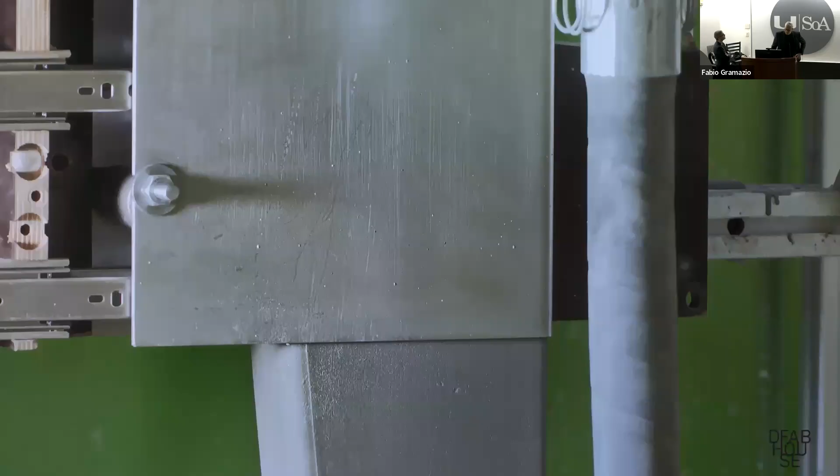Then there is another project. These are these little facade columns. They are not load bearing, but they're just taking the wind loads from the facade. This process is called smart dynamic casting. It's a very clever project developed by our PhD here, Ena Lloret. She's now professor in Mendrisio.

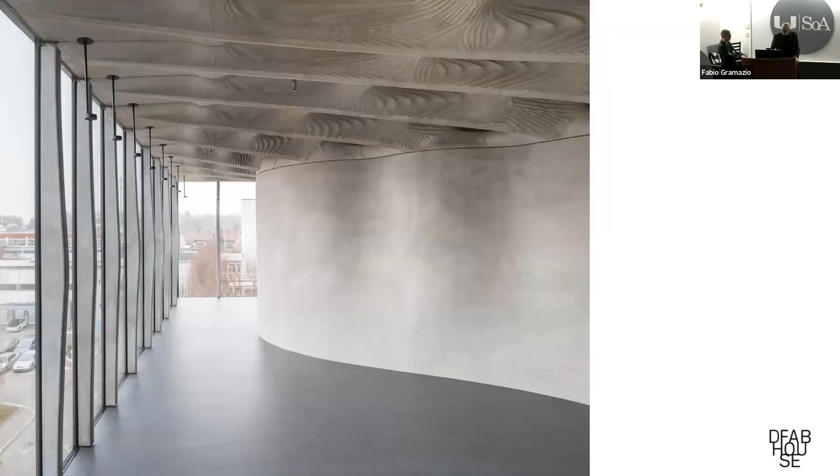Concrete is filled in a small slipping formwork, and it cures exactly at the moment when it's at the bottom of the formwork. And so this formwork can slowly slip up while the concrete is always able to sustain its own weight. So it's almost like an extrusion process for concrete, where again, you don't need a complete formwork and you can change the form while you do the slip casting. So here you see these slender elements. They all have a varying size.

And on top, I'm not going to explain the project, but this is the so-called Smart Slab from the group of Benjamin Dillenburger. Very nice piece, which is built with a 3D printed formwork. Quite an elaborate process. But here you can see that building with concrete doesn't need to look like we know it, because there are certain stereotypes or ideas about what an exposed concrete building looks like.

But as soon as digital fabrication processes come along, we can reinterpret these conventional material processes, and maybe the expression of these processes starts to change, hopefully in a more sustainable way, because as we all know, concrete is a bit of a tricky product with respect to CO2 emissions. So you see again these qualities, which of course are visually very appealing, but also can have acoustic qualities, etc.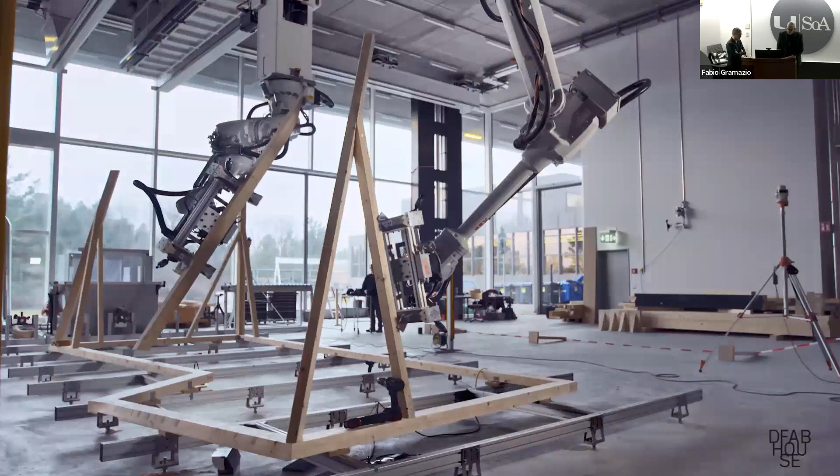On top of this concrete base or table structure sits a timber structure that automatically adapted to whatever would be built below. So this structure is kind of computer generated. And we built this in our robotic fabrication laboratory. You see here two robots collaboratively placing timber elements. The structure was made such that we always have a stable structure. So here the robots place the corner elements first, so that the corners are kind of triangulated, and then start to place the beams and the other elements in between.

So actually, I mention that to say that robots are not only tools for automation, but we also need to rethink how we construct, literally in terms of sequence, what comes first and what comes after, when we build with robots, and that also has an architectural expression.

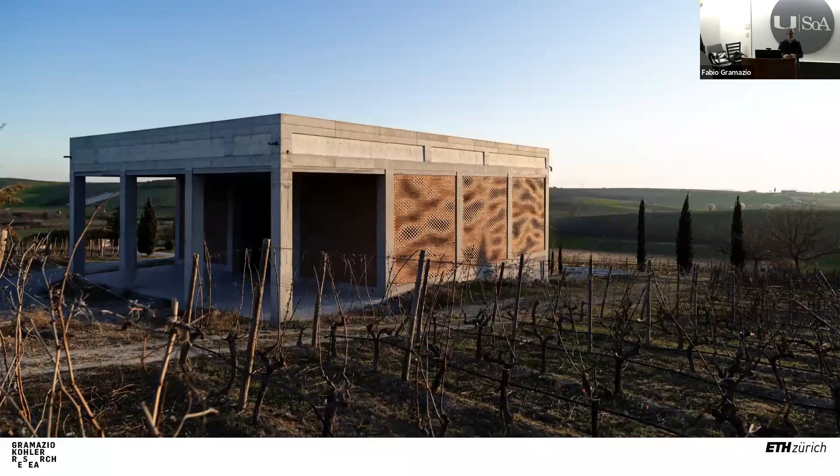Okay. Now we're almost done, but we have another two projects, I think. This one I'm going to show you is again a brick project, 15 years after the winery. It's again a winery. It's in Greece, and it's a strange story because we got a mail from a winery in Greece, and they basically wanted the same thing we'd done in Switzerland in 2006. And we thought it through and concluded that it wouldn't make any sense to produce robotically prefabricated brick elements in Switzerland and ship them to Greece a few years after the financial crisis, just mad. So we politely told them that we would not like to do this, but they insisted.

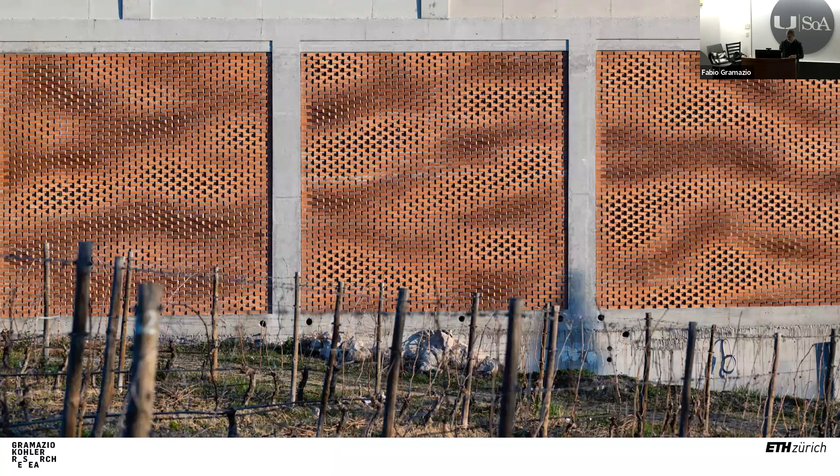And if we go closer, we also started to use mortar to build this wall, a thing that we had to exclude in the first experiment because it was not feasible with a machine. A robot could not use mortar, so here we decided to go extreme with the use of mortar, to have it appear as the counterpart to the brick, with these brick courses going up and down. And the technology we applied was back then very experimental.

Now this has also moved into a spin-off of ETH. It's another group, in robotics, which now starts to develop these processes specifically for the timber construction industry, where they have the low-hanging fruits. If you know where parts are in space, then you can close the gap between the data space, what normally only the robot or the machine can interpret in an efficient way, and the human as a designer, and then you get this very hybrid situation.

So if we think back at this very simple dichotomy between the designer, the human, and the machine that I've shown you at the very beginning of the lecture, here it gets much more complex, because where do you put such a process where the human and the machine really start to become one? What you see here is how it worked back then.

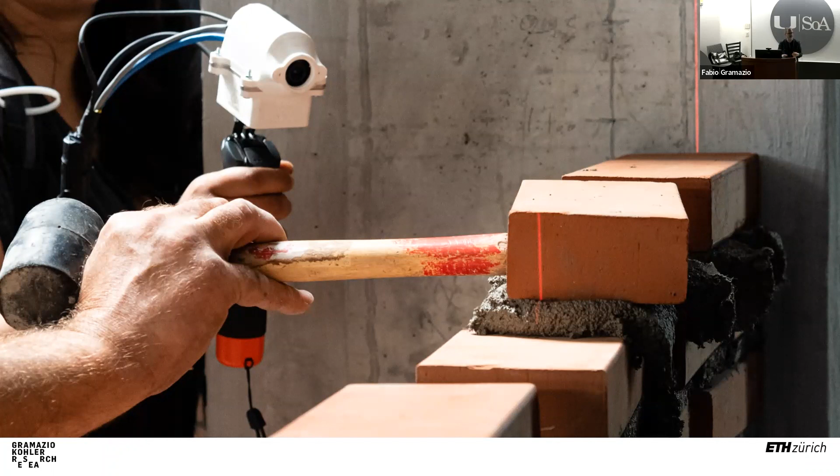This is 4 years ago, we had a screen on the building site that was showing the mason that is placing a brick. The first placement is pretty intuitive. You just place it, and then by tapping, you bring it into the right position. It's what you see here. So there is this augmentation of the human.

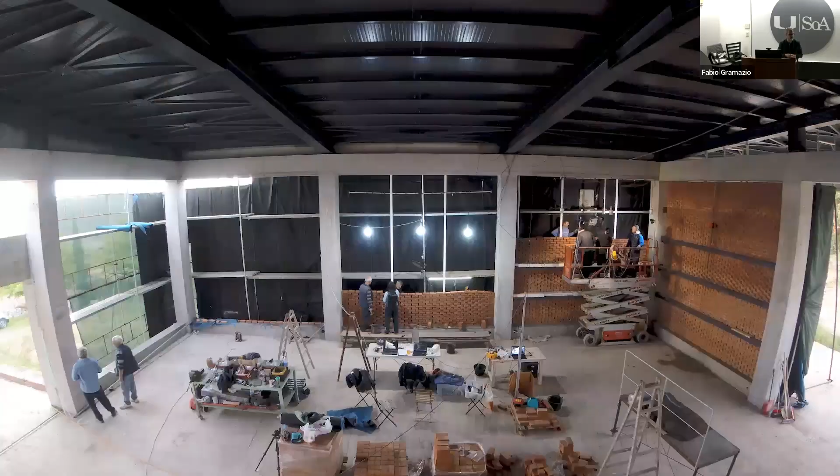So now we're not automating the human, we are augmenting it, just giving the human, who is mastering a very, very complex process, an additional tool to allow him or her to do things that wouldn't be efficient. They would be possible, but completely crazy and inefficient without these tools.

Here you see now the final. This was also PhD research, a thesis that is now concluding, by Daniela Mitterberger. What was very interesting to understand, by interviewing the masons that were working 3 months on this building site, is how they would relate themselves to this augmentation.

And at the end of the day, you could conclude that they were extremely fast in adopting this thing, and also extremely positive and proud about how this would increase the potential of their craft, so not questioning their craft, but increasing its potential.

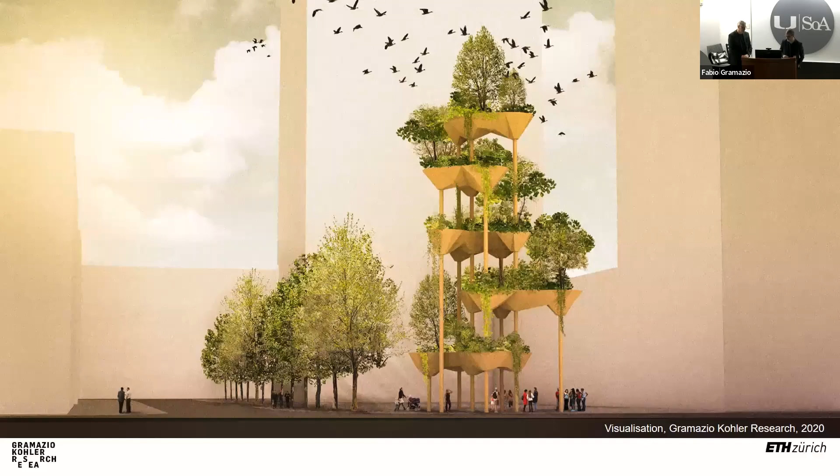Good. As a last project, we're going to show you Semiramis. This is part of an urban development in Switzerland, in the city of Zug. It's in a former industrial site of, I don't know if some of you know, a brand for appliances called V-Zug. So this is basically their production site, and they do quite big urban redevelopments there.

They came to us because they wanted something which is a strong sign towards the future. Originally it was more something like a small installation, maybe a little pavilion. We were looking at their master plan, and we saw that they were building tremendously high developments there, really massive buildings. So we said, if we want to do something here, it's not about size, but this needs to be visible also in this massive context that you're building.

So therefore we started to create this concept of a very vertically developing garden, one which is not accessible by humans. This was basically our condition. We said we're going to plant up there. Animals can live up there. You will not go there, but you will see it. You can't touch it. So this was basically the design setting.

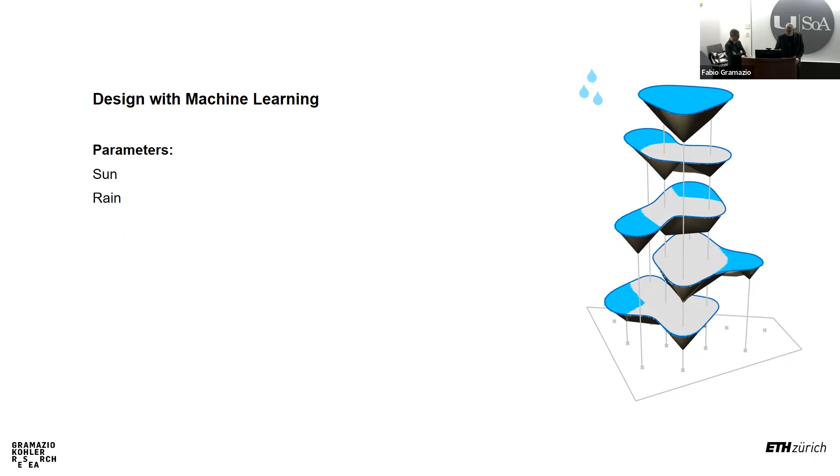There's one interesting thing with machine learning: we can actually start to reverse processes. What we did here is we took 3 simple parameters. This was a very basic experiment. How many square meters get sun on such a structure on average days, how many square meters get rain, and how big are the surfaces of such a structure.

These were the parameters which were learned by a machine learning system over 500,000 variations of such structures. And then we could basically reverse design the structure. So here you see an example.

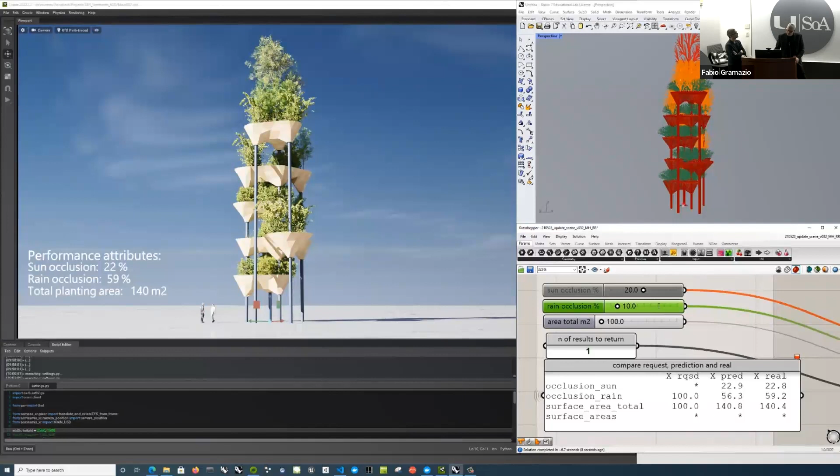You see here, for example, how we slimmed down the number of square meters, and suddenly the system proposes this slimmed out structure. Here the rain occlusion is diminished, meaning the shells should be wider apart so that more rain goes onto the shells. This system, which we created ourselves—so it's not foreign to us because we made it—gives us propositions on how this could look if we wanted to change those parameters. It always gives us plenty of options to look at.

So we challenged ourselves a bit: okay, can we design with such a system? Do we feel alienated by it, or is it exciting to actually design such a system and then build with it? It's in a way what we did with M-Table, but with a bit different technologies.

And that's what we did. We actually designed with the system, and it was quite pleasant to do so. It wasn't the easiest path—it would have been more simple, obviously, to do it on a napkin. Probably it would have been equally performant, I need to say.

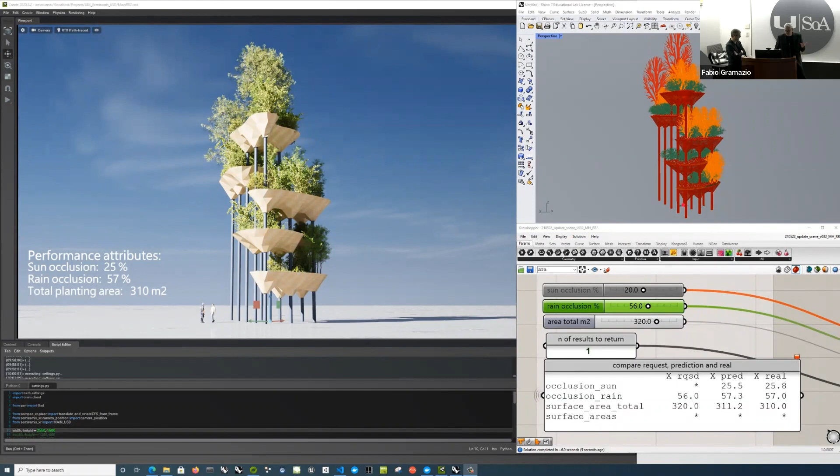But it was an interesting experiment for ourselves, to see if we could delegate part of this decision process and what this means. I think one of the most important findings of this part of the process was that, by the sheer number of possible solutions, we were finding solutions we didn't think of, and we found characteristics of the final configuration—this one—which we liked, which we would have designed if we had designed it by hand. So the interesting thing is exactly what differentiates this design from a design by hand or on a napkin, or however you like to do it.

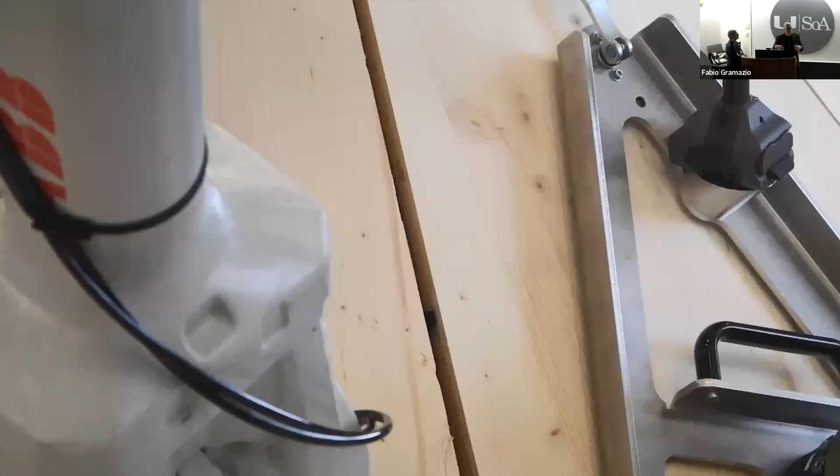Then another part was the fabrication. This was the first time we used all four robots that we have in our robotic fabrication lab. It was a bit of a challenge to ourselves. Basically, it's a timber shell structure, which is assembled in this mode. These robots drive together these timber plates, which were pre-cut, CNC pre-cut, precisely in space, so you don't need a formwork.

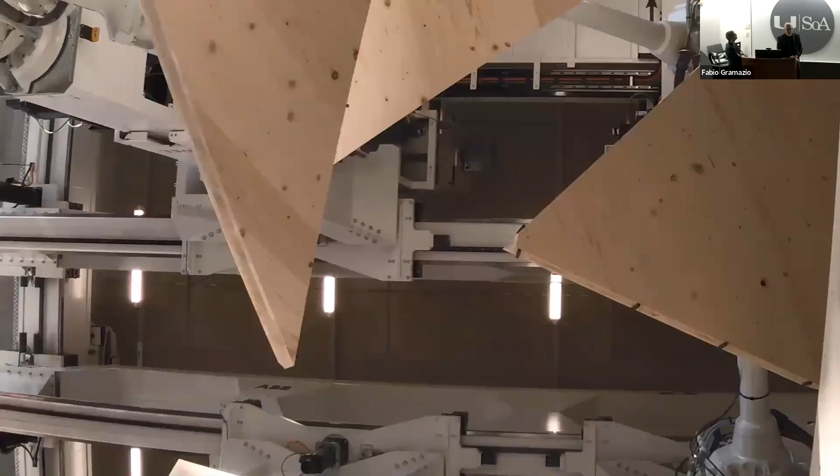On how to position them in space, then there is a special connection system—it's a glue which you can fill into the gap between those plates. This creates a fully continuous structural shell. It's actually quite a material efficient system. If you look at it, you see how thin it is—it's like a folded plate, spatially folded plate.

It would, of course, be better if it didn't even have glue, but I'd say it's only a minimal amount of glue. Like this, these pieces were assembled with some additional elements, and they were brought onto steel columns and assembled into the structure.

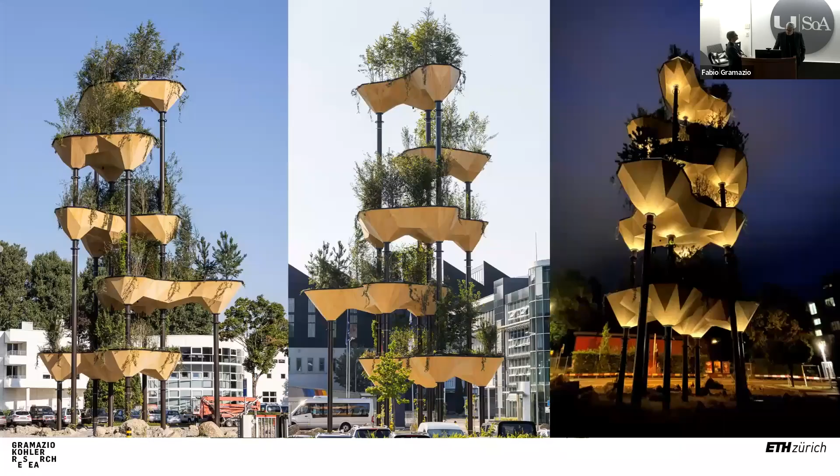This is shortly after the erection and the plantation. It was still a bit underdeveloped, not quite the jungle that we imagined, but more and more it starts to grow. It's actually quite full right now. This is not the latest state, and it develops quite nicely.

It's very beautiful to see from underneath, because if you walk around this structure, it always looks highly different. It's very similar to what I've shown you with the Gantenbein project, that the light creates this diversity, which in a way also reflects the diversity that was created with this machine learning system.

And yeah, with this, I would like to conclude.